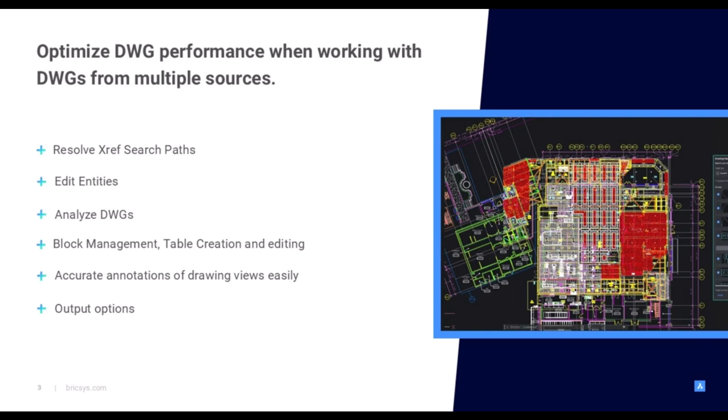From resolving missing XREFs, to analyzing drawings, to annotating and outputting drawings, she'll show you just how easy BricsCAD V25 makes it to ensure drawing health and performance when working with DWGs from multiple sources. Julie, over to you.

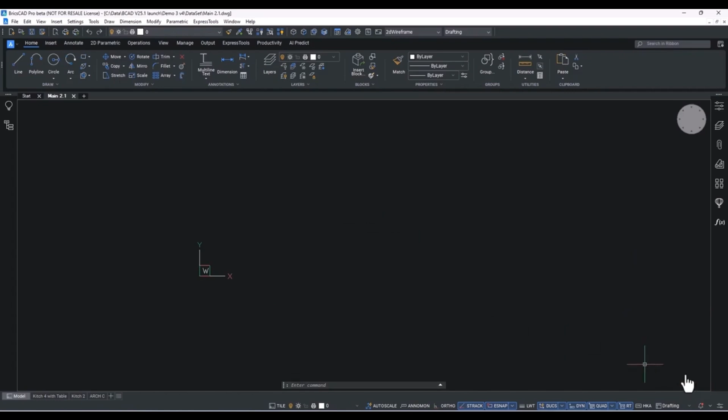BricsCAD's new open file dialog brings a modern toolset to drawing file management, and it probably looks familiar, just like many of the other Windows-based menus that you're using. Now, is there anything more annoying than opening a drawing and seeing those dreaded red triangles, meaning that the XREF paths have not been found?

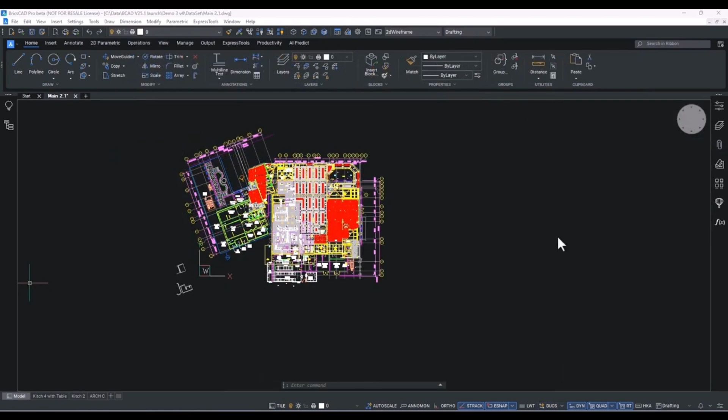BricsCAD's enhanced extended search looks in more than 2 subfolders to find those correct paths, or locate a single drawing and let BricsCAD apply the same path for the other missing attachments. With the XREF paths resolved, let's look at the interior layout. Well, it's missing a few doors.

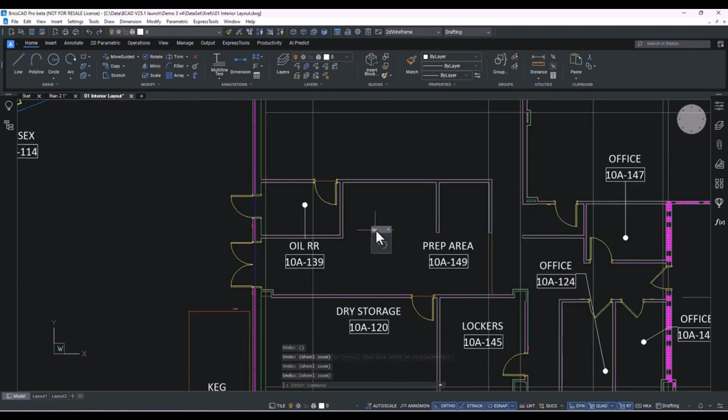BricsCAD offers several workflows to add doors, including the traditional copy command that we've been using for decades. However, this method requires additional trim work. A smarter and easier workflow is to use Copy Guided, which automatically aligns the door with geometry. When only the door is selected, you have control to place it exactly where you want, either by visually positioning it or by entering specific values.

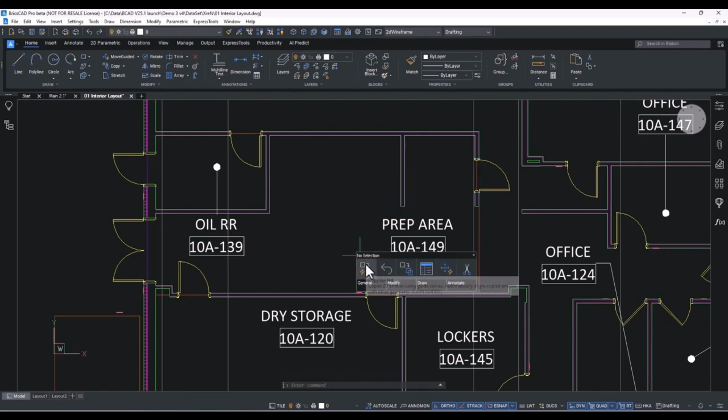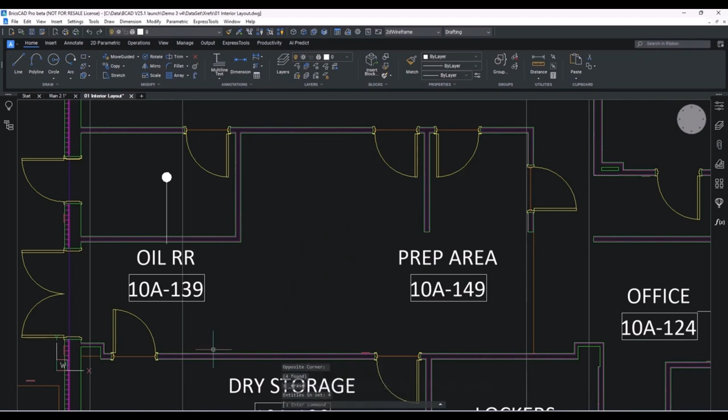The selection set of the door impacts what you are copying, so when the T-wall is included in the selection, the door is placed at the same distance from matching T-walls. Smarter by potentially reducing errors, and definitely faster and easier. Well, now we have too many doors. Move Guided acts like an eraser, moving the door out of the wall and automatically healing the wall lines. Copy Guided and Move Guided have several other options and work on most entities.

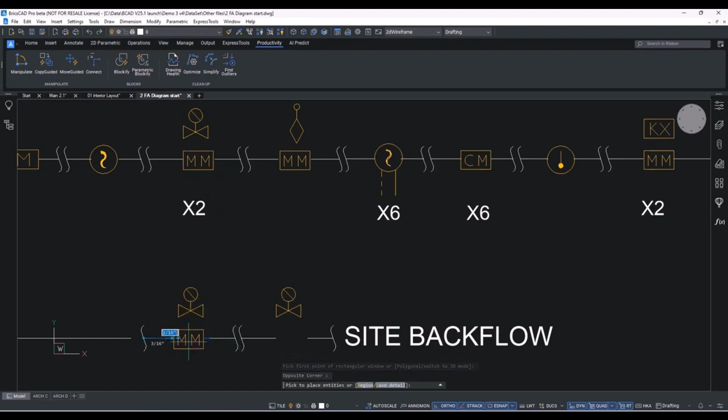Here is a single line diagram for the fire alarms. The monitor module symbol is missing in the bottom line, specifically here and here. Using Copy Guided, you can quickly copy the symbol into the correct location. And notice the space between the symbol and the line on the right is maintained.

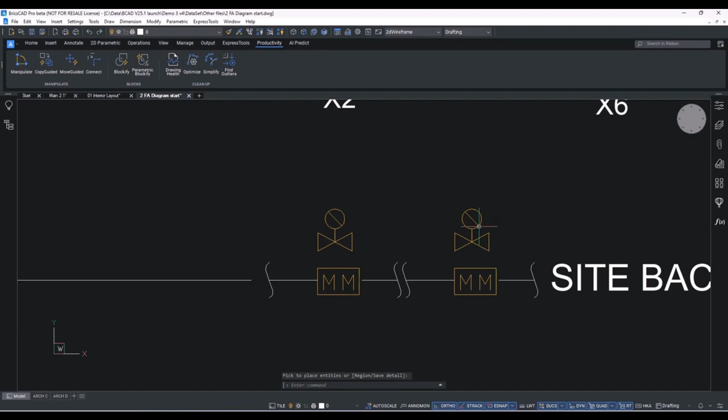Now, this is all well and good, but these symbols should be blocks. And traditionally, we could create a new block, delete the existing line work, and insert that new block, as we've done again for decades. Or use Blockify and let BricsCAD do the work. In V25, we've updated the Blockify command panel with all the options and expanded search capabilities, making Blockify smarter than ever. Currently, we need to match the existing fire alarm block.

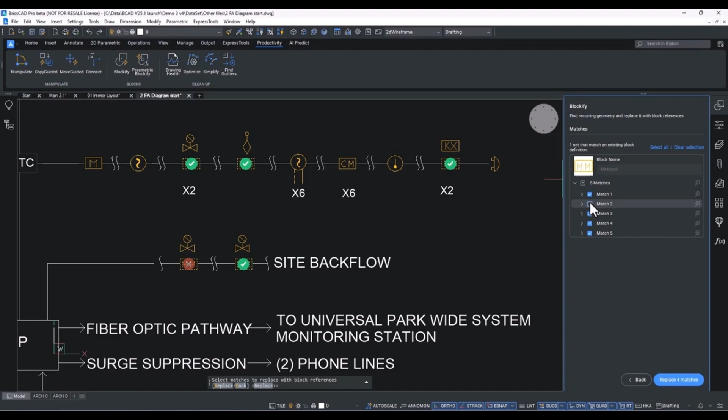New in V25 is the ability to choose where to look for that matching block, whether in the drawing, BricsCAD library, or a folder of your choice. How smart is that? BricsCAD finds 5 sets of geometry to convert to a block. You can decide which entities to convert, all of them, some of them, or none of them.

When receiving drawings from external sources, we never quite know what we might get, right? So let's look at the fire alarm layout drawing. It's a small drawing. And here again, we're going to see that the alarm symbols are no longer blocks. Ugh. Now, what else needs to be fixed in this file? And more importantly, how do I know what might need to be fixed in a drawing I'm not very familiar with? First, we need to analyze the drawing with Drawing Explorer.

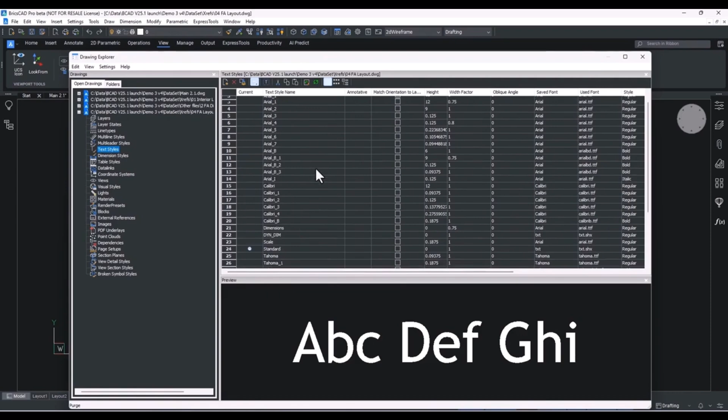It provides insight into the drawing, and here's a summary of the styles and content in the drawing. Now, I'm suspicious about 600 blocks in this small drawing. The detailed information about the blocks lets us see how many times a particular block's been inserted into the drawing, or if it's been inserted at all. So this could be why there are so many blocks in the drawing.

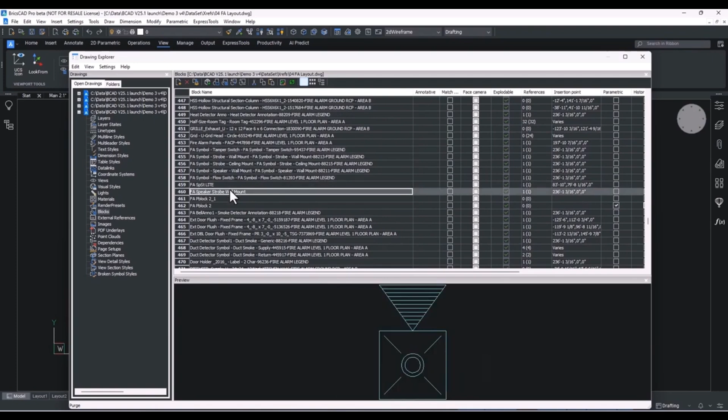And we can search for block names. Let's search for, starting with FA, for the fire alarms. And here is the block. It's only been inserted once into the drawing. But now, how do I find that one block in the drawing? Well, we can use the structure browser.

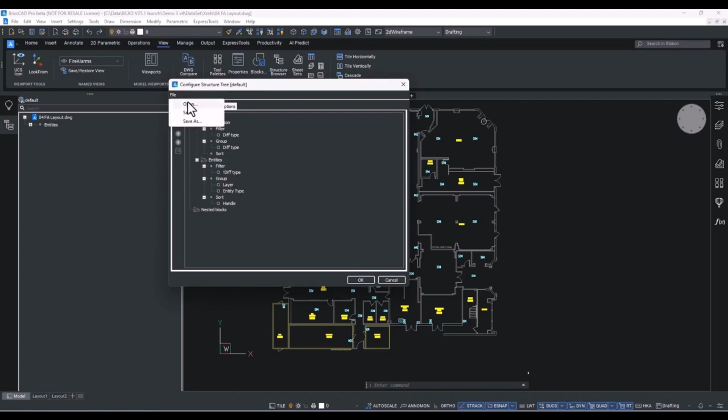This is a non-graphical tree view of the drawing. By default, it's organized by layers, just like our drawing is. But the power of the structure browser is that you can change how it organizes the data. We're looking for a particular block, so let's organize the structure browser by block name instead of layers. This makes it easy to search for blocks starting with FA. Here it is, and we can zoom to its location right within the drawing. So we found the block in the drawing.

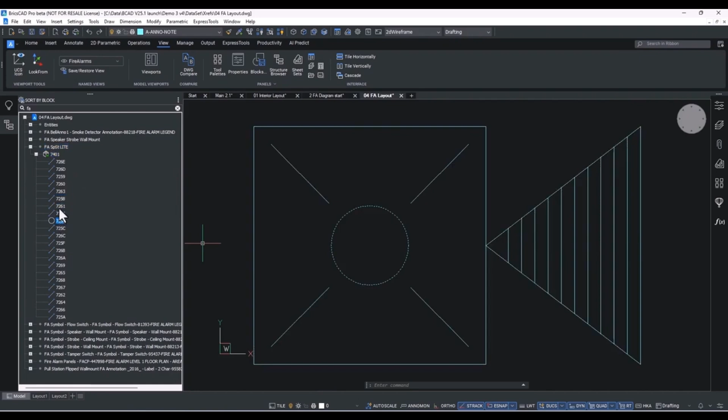Now what? BricsCAD includes smart tools to make quick work out of repetitive tasks. And many of these tasks can be grouped together in a drawing health routine and simultaneously run against the drawing. In V25, managing routines is smarter, with the ability to provide descriptions to those routines. And the command panel's been updated, providing more interaction so you can make smart decisions during the routine. Let's run one. Here you have full control to purge blocks, styles, and more from the drawing.

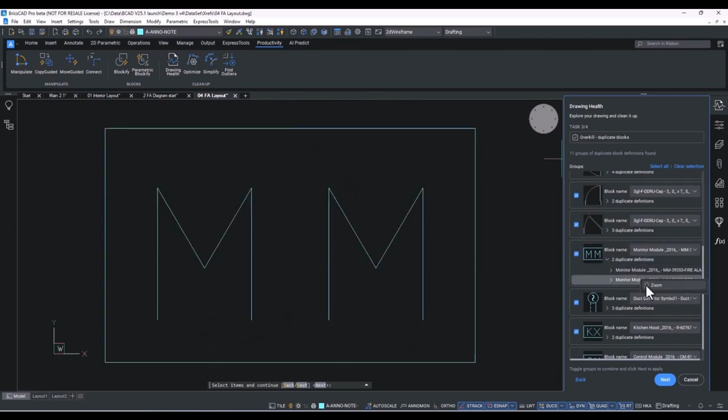Next, let Audit analyze and fix any drawing errors. Drawing Health finds all these duplicate blocks, and you control which block to keep or delete. If you're unsure about a specific block, zoom to the location in the drawing before making your decision, or let BricsCAD decide. And again, here is Blockify. This time it found 47 matches.

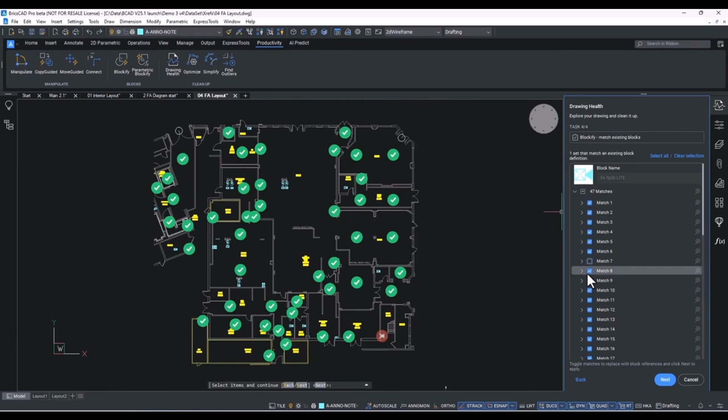Think about how long it would take you to replace the existing entities with a block in the right location, in the right orientation, 47 times. Now, after this particular routine, this file was reduced in size by about 75%. And the number of blocks was reduced from over 600 to 83. Because remember, a healthy drawing not only saves you time and aggravation, but also storage space.

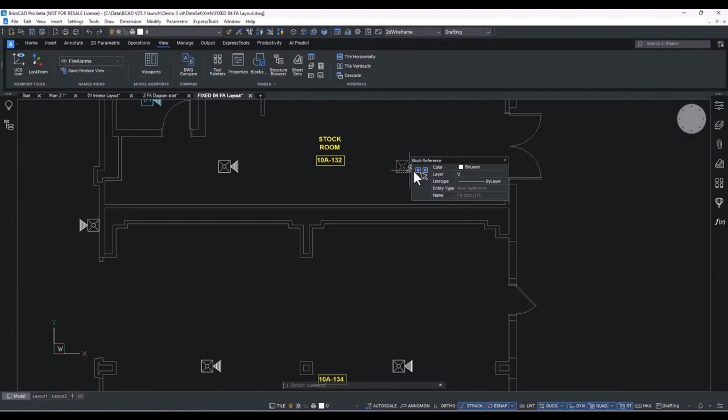Are my new fire alarm blocks on the wrong layer? I think so. Mistakes happen, but what's important is how easily they can be fixed. With rollover tips, it takes no time at all to move all the blocks to the correct layer in one click. Now, what else can we do with this block?

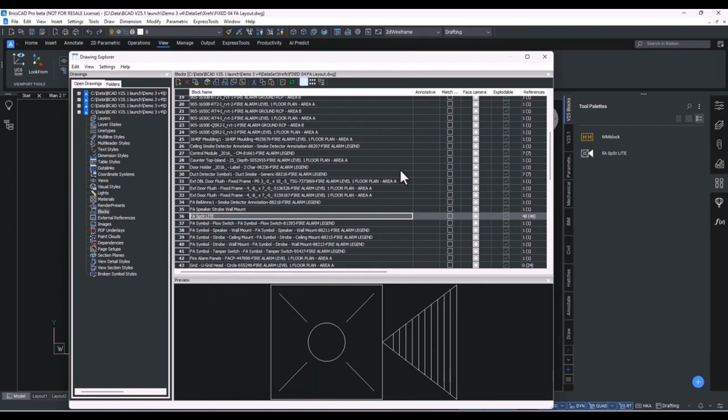Well, it should be available for use by others in the company. One way to share it is by adding it to a palette, which can be quickly done via the Drawing Explorer. Additionally, you can specify the correct layer it should be placed on from the properties to eliminate future mistakes.

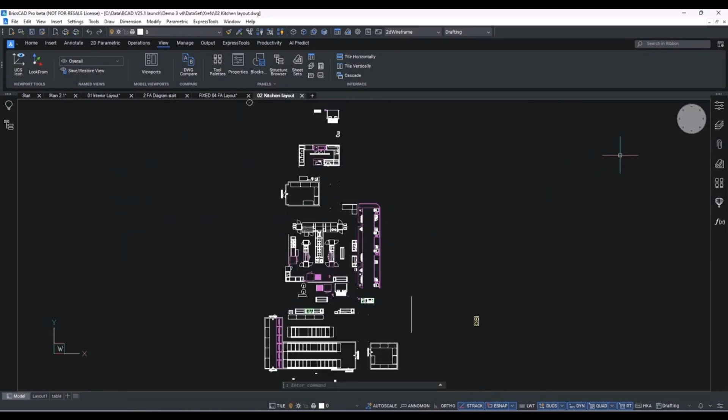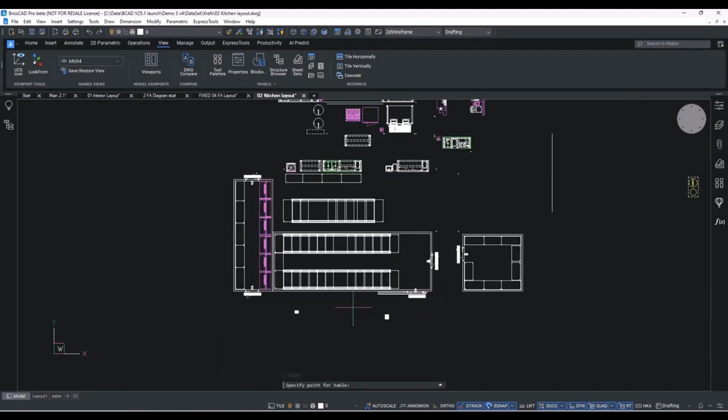Speaking of blocks, we've received the kitchen equipment layouts from the consultants. A saved model view was created for each of the workstation layouts, and each piece of equipment is represented by a block, and those have already been added to our palette. We need to count the blocks, generate a table, and add pricing information to the table. There are several ways to do this in BricsCAD. I'm using an AutoLISP routine that automates the process and creates a fully editable table.

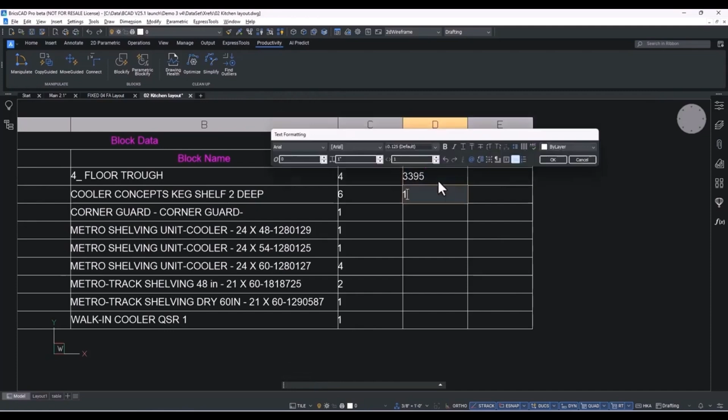BricsCAD V25 continues to enhance functionality around table creation and editing. It now supports Excel-like formulas for, say, subtotals and totals. These formulas can be easily copied from cell to cell, just as you'd expect. And here, these formulas update based on the information in the cells.

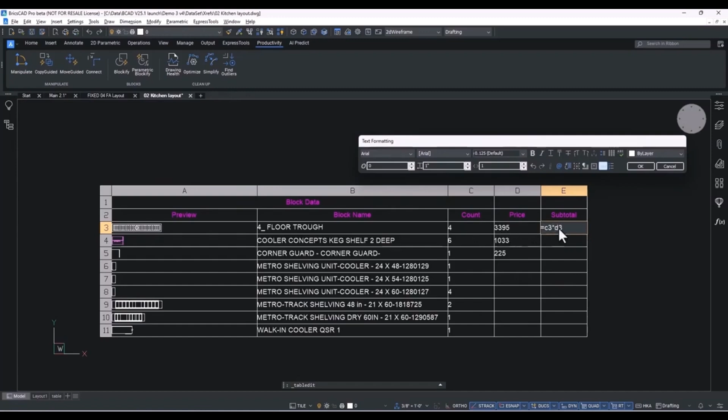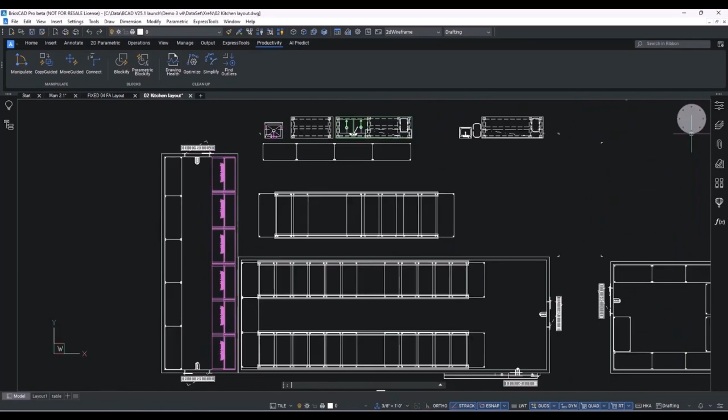We've made V25 more familiar by adding viewport, standard, scale, and annotation scale fields to the new status bar. Now the annotation scale is also saved with your model space views, ensuring you always know the scale that view was created at. Adding the viewport scale controls to the status bar allows the layout scale to be simply set, or you can add the viewport scale to your rollover tips for another quick way of editing.

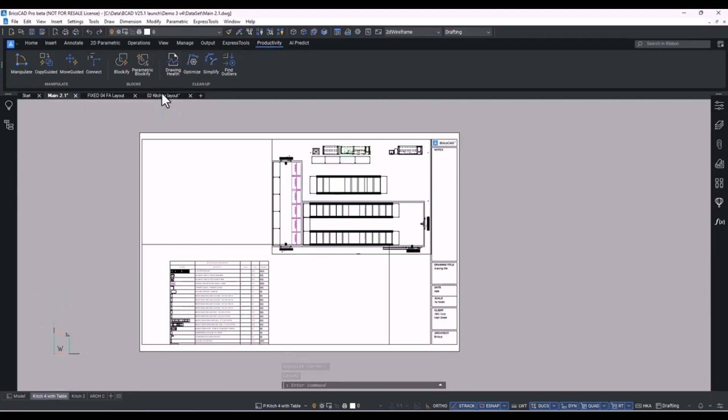Remember the table with the kitchen equipment blocks? Well, we've added all the blocks to that table now. And it's easy to create the needed table breaks to fit the paper space viewport and also customize the display of the table from spacing options to repeating the top or bottom labels.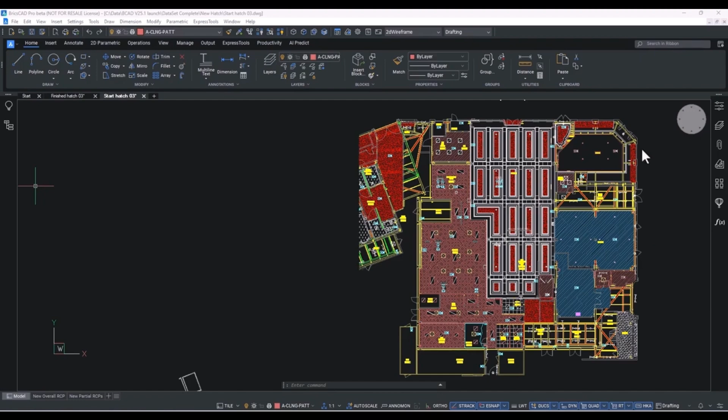This drawing represents a reflected ceiling plan featuring various hatch patterns. However, the hatch patterns are a bit of a mess, meaning that some areas are missing boundaries, making it challenging to edit the existing hatch. Other areas are not properly hatched, meaning that text, blocks, and other entities are included in the hatch. So let's explore the improvements made in V25 to address these types of challenges.

Here we see an XREF and the hatch pattern itself, but no boundary. It's a bit difficult to select one or the other, but new in V25 is selection cycling, which makes it simple to select overlapping entities in BricsCAD. Now you can clearly hover over each entity and see it highlighted, which makes it easy to make the appropriate selection. And here's another improvement.

Once selecting the hatch, right-click to bring up the new context-sensitive hatch edit menu to easily create a boundary around those existing hatch patterns. Selection cycling now shows all three entities, and we can easily fix or edit the hatch to exclude the blocks and text. Now that's an easy fix.

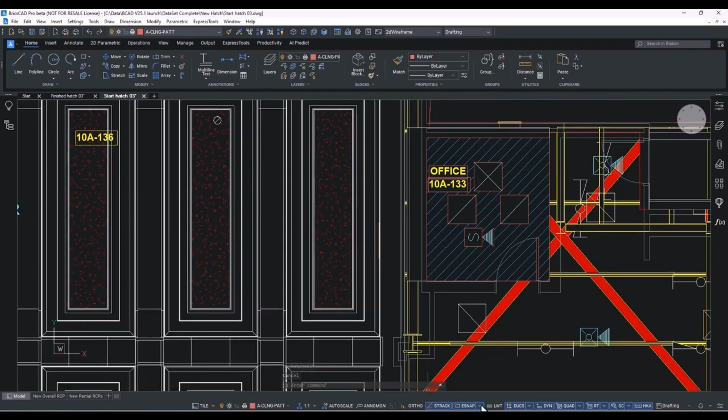Down below here, I'm not quite sure what happened with the polyline boundary, but no worries. Building on previous BricsCAD releases, we're thrilled to introduce enhanced editing capabilities for P-line vertices and segments. You can now effortlessly add and delete multiple vertices, and we've incorporated a preview feature that allows you to visualize those changes before finalizing your edits. Now that's both smart and user-friendly.

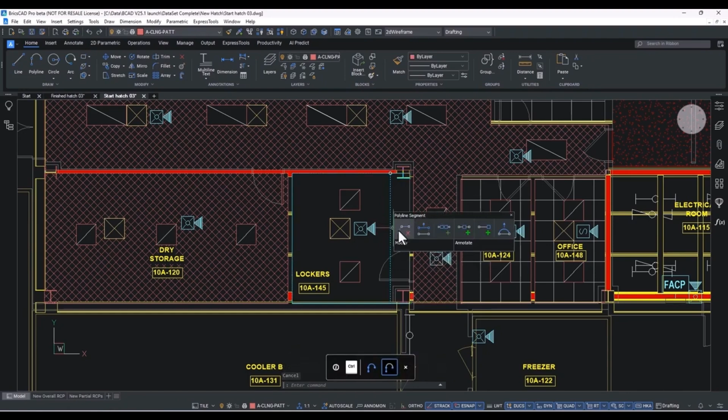With the P-line boundary fixed, it can be stretched over to the wall at the right and then add the hatch pattern. And now in this room, the hatch is complete.

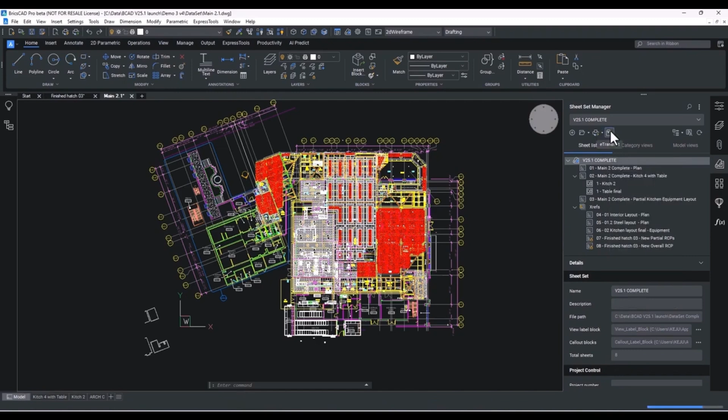When it's time to share drawings with project teammates, BricsCAD V25 continues to offer easy and familiar choices. eTransmit now includes the choice to bind or insert XREFs. It's available here through SheetSet Manager, from Drawing Explorer, or simply type in eTransmit at the command line. You choose the file format, the output type, file folder, and structure. Remember though, you just may want to run these drawings through Drawing Health again before sending them out.

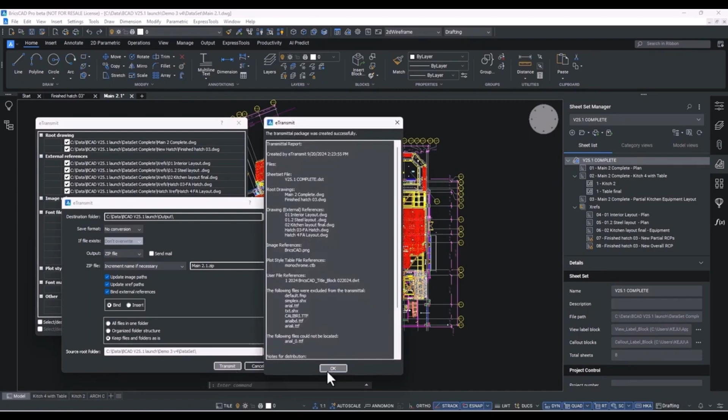Publishing workflows are also familiar, whether you publish from here, SheetSet Manager, the Layout Manager, or the Publish command. You decide which workflow is best for you.

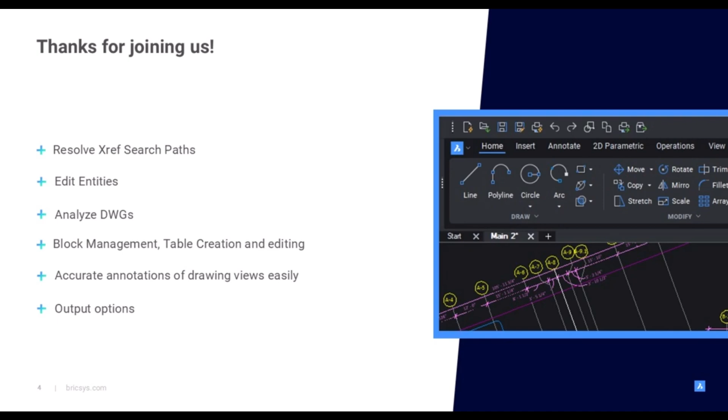Thank you, Julie. Now, I hope this brief presentation has given you an idea of just how easy BricsCAD can make the process of optimizing your drawings for health and performance, no matter where they come from. And this just scratches the surface of the great new functionality we've introduced in V25.